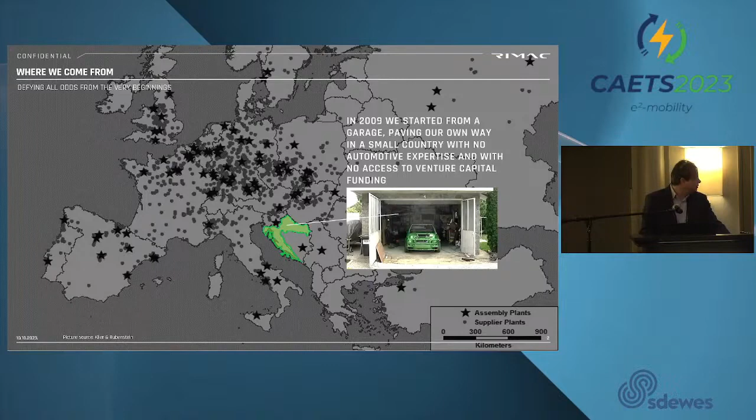Until Mate Rimac started the company in 2009 in a garage, changing his combustion engine into an electric motor, and then started winning races with his car and gathering the money. He founded the company with the aim to create the fastest fully electric vehicle in the world, and also provide technologies to other partners. So that was in 2009, 0 employees, 0 revenue.

And today, actually, we are about 2,000 employees, with a certain amount of revenue. Beginning of 2022, we carved out the company originally called Rimac Automobili into 2 companies: Bugatti Rimac, we'll say a few words later, and Rimac Technology, which is the supplier of components.

And this image that you see is one of the biggest projects in Croatia in terms of real estate, the campus Rimac is building close to Zagreb.

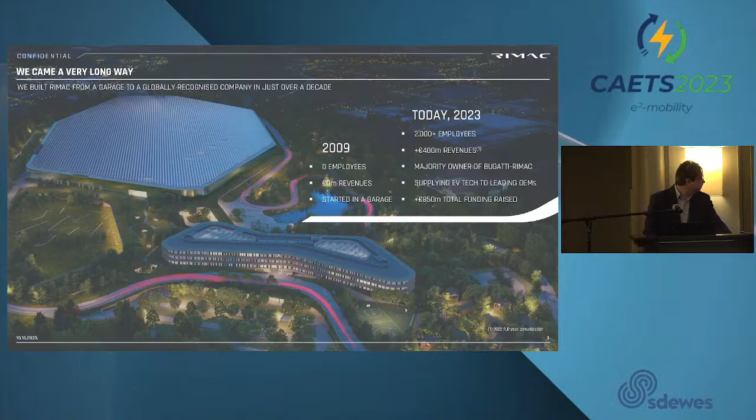So 2 companies, 2 businesses inside the Rimac group. Bugatti Rimac, with the aim to develop hypercars. So a very, very limited amount of vehicles, very exclusive type of customer, right? People who can afford vehicles above $2 million.

Usually. So the aim of this company now is, of course, to produce all the Rimac vehicles, the Nevera, that we will just introduce in the next slide, and all the next Bugatti, the famous Bugatti brand, and their next vehicles. And there's a part of the business which is a different company called Rimac Technology, with the aim to provide core technologies to car manufacturers in general. So the main focus is in electrification, providing full battery, axle, powertrain, but also technology like autonomous driving.

Control systems, and such. So the Nevera is the world's fastest hypercar, fully electric and homologated. That's very important because there's a lot of vehicles that are fast but not homologated. So we were wondering how we can help our customers to master this vehicle.

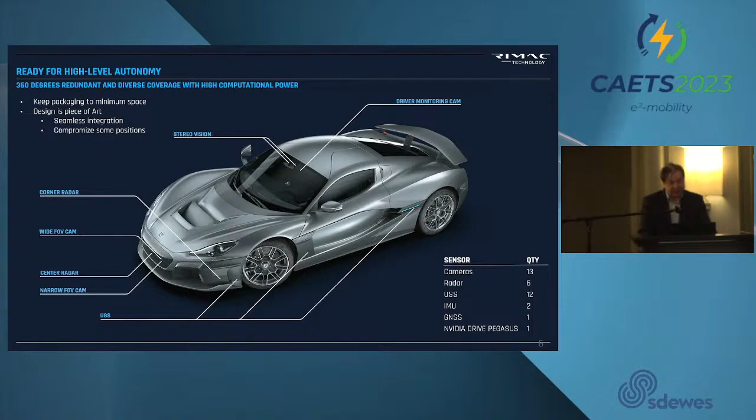So what is the product we developed with this autonomous driving? We call it the driver coach. Imagine the idea: you own a car and you go on a racetrack where you need to master a certain amount of skills. So the vehicle recognizes the track and says, welcome on, I don't know, Silverstone, for example, in UK. And then the car proposes, do you want me to demonstrate what you have to do?

And that's a fully autonomous demonstration. So you're on the track and you are totally guided by the vehicle.

It's driving autonomously at a speed or performance that you can adjust as you feel comfortable. While this is totally automated driving, you receive in your helmet, because on the track you need to have a helmet, a 3D audio feedback. So instructions, what the car is doing, all information about braking instant, steering instant, and so on. And you have also visual feedback on a cluster of the vehicle.

When this lap or 2 laps are finished, the session is completed, then the car can tell you, now it's your turn, show me what you can do. During this time, our AI supervises the driver, analyzing the skills of a driver and classifying it through beginner to professional by looking at the braking capability, throttle, steering, trajectory, and so on, and of course the speed.

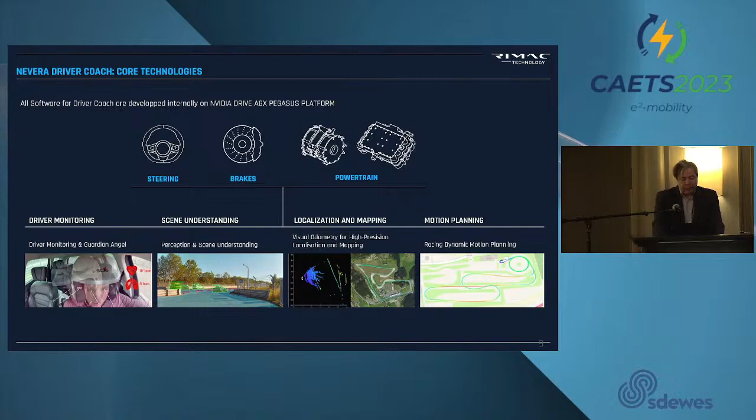So the vehicle, it's not only sensors that you need to equip, but you need to make it possible that you can control all the elements. That goes from the steering, the brakes, and the powertrain. Once you are able to control that, special parts of a vehicle and special additional software or suppliers are needed for this high level of autonomy.

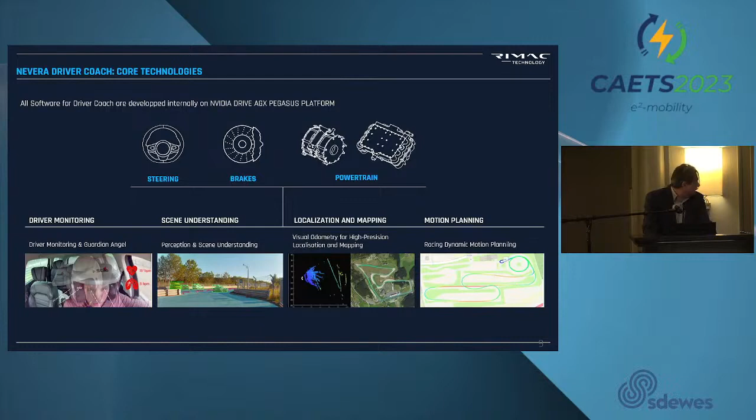And we are developing internally these 4 core technologies that I will pass in the next slide: perception, driver monitoring, localization and mapping, and motion planning.

But just before going to that, it's how we develop. So we need data, right? And this data, we have a small fleet of sports cars, the Kia Stingers, and we have our Nevera car. We have just one. It's a very expensive car, but I'm very lucky. I'm the only department in the company who owns a Nevera, so we can play with it on a track.

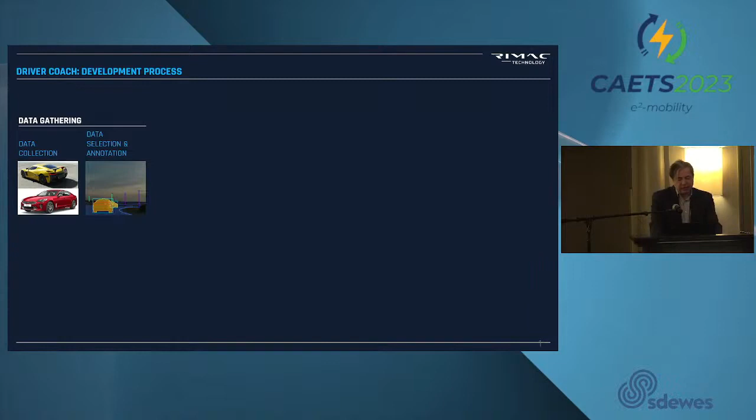And once we collect the data, we annotate it, but that's a heavy process. Another way is what we're using in simulation. While you use simulation, you can build scenarios and get the ground truth of the data automatically.

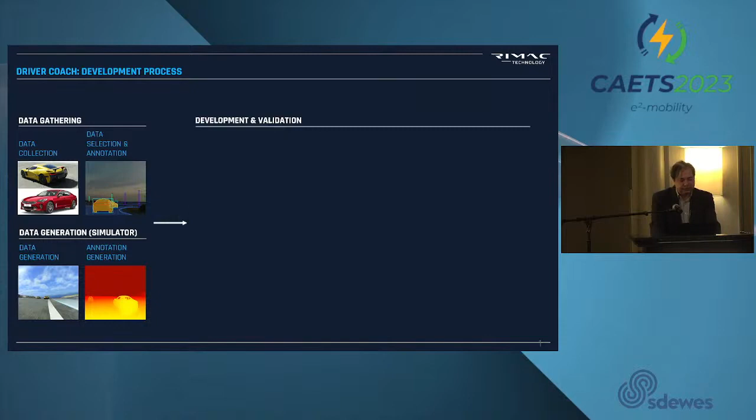And we are doing software in the loop development for all the core technologies. We're doing hardware in the loop to ensure that all the processing is executed in real time. And for example, we are also not allowed to put a piece of software in the car if it's not tested in what we call vehicle in the loop.

We have a big room where we have, I would say, the body of the vehicle and all the controllers inside the vehicle, and we can test the software. Of course, you cannot test autonomous driving in a room, but you can test all the interaction with the other entities of a vehicle and solve the first problems in terms of communication and the first bugs.

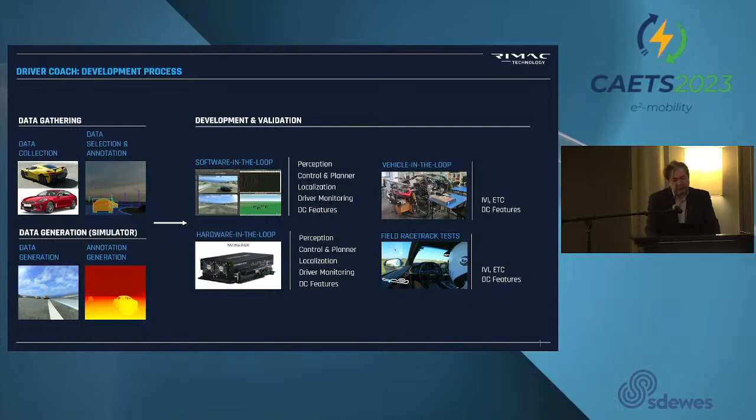And then once we're happy, we are testing on real racetracks with our team of pro drivers. This is the racetrack that we visited. It's mostly in Europe, about 26 tracks, all the most important ones here this year. Still, by the end of the year, we plan to go to the US, and early next year, probably to Japan.

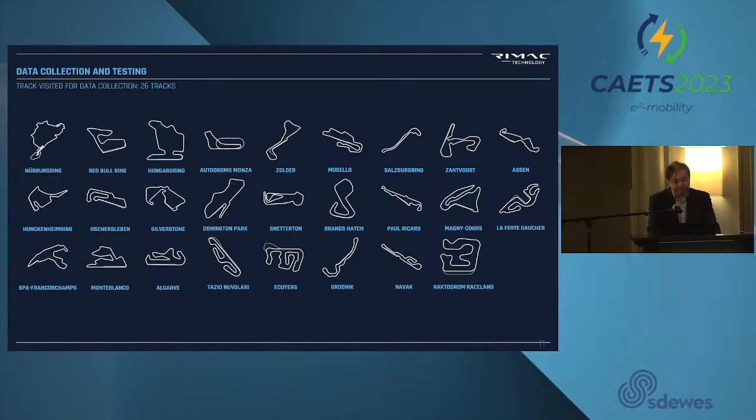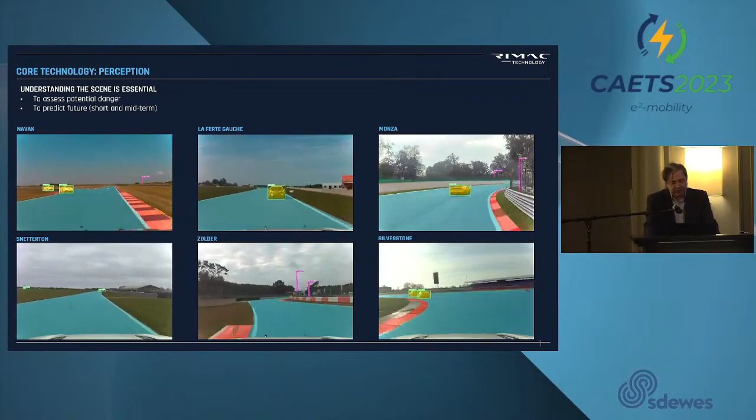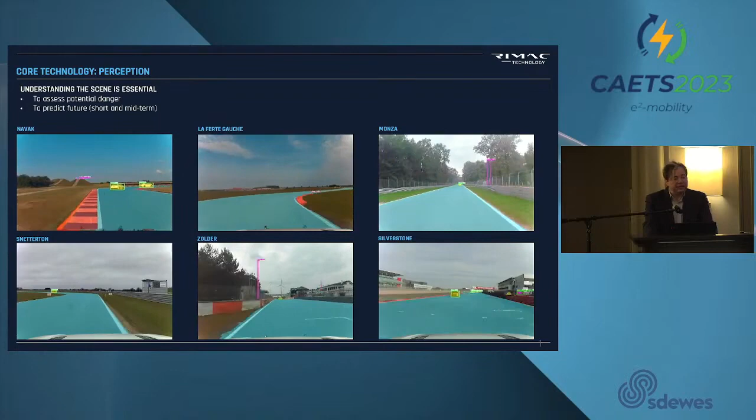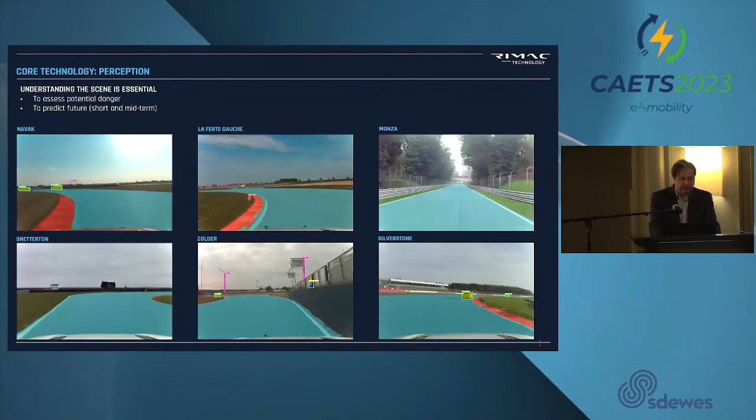So the perception, detecting the object - that's one thing. You can think, but what are these objects on the racetrack? They are probably very different than on a road. Yeah, you have very similar objects. You have pedestrians on a racetrack actually, you have vehicles, you have roads, but you have things that are new, like the curbs. You have similar things like the poles, but you have racing flags, racing lights. You can have, for example, a safety vehicle coming if there's an accident. And you need to be able to understand what's happening, especially when you drive autonomously.

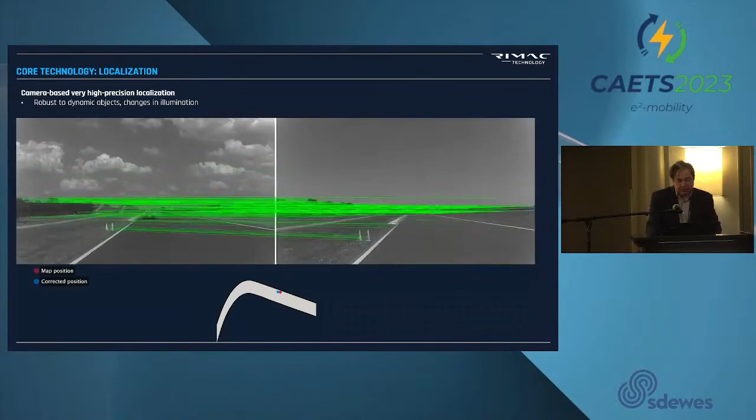In terms of localization, you see that's the same track, but taken at 2 different instants - you see also one, there's no cloud, weather is a little worse. What I want to show here is just that we can track the feature between these elements to be able to localize us precisely below 10 centimeters.

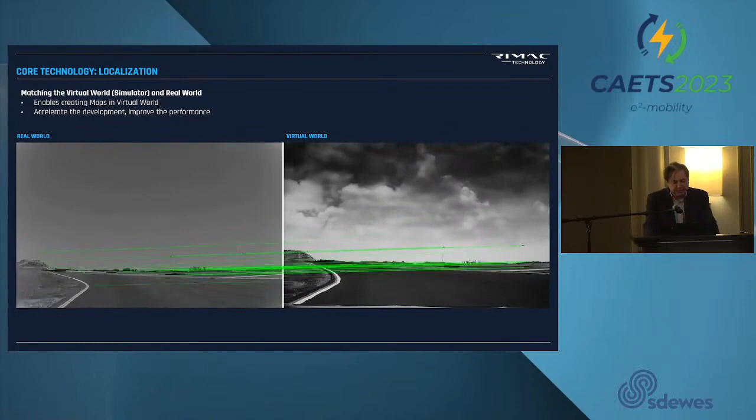But mostly, the task of mapping is quite an expensive task because you need to go on a racetrack. Usually you need to rent the racetrack for yourself, so it's pretty expensive. So one way we do the work is we work in simulation. What you see here is the same track - on the left side you have the real world, and on the right side you have a virtual world. And you can see we can map some features and understand where we are in this virtual world.

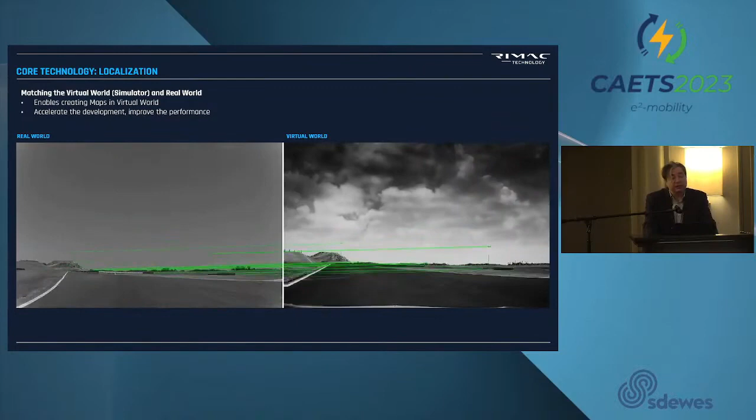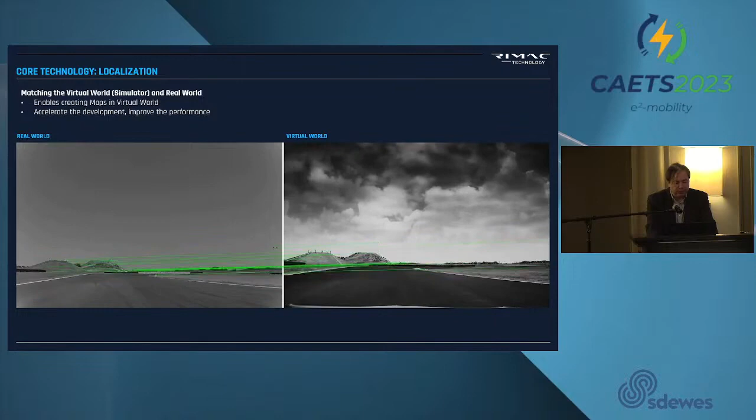This, for example, helps us for tracks like the Suzuka racetrack in Japan or Laguna Seca in the US, where we do not need to go to map the track. We can either purchase the track and work on it, and when we are happy, we go on the track and we tune or finalize the development of the algorithm.

In terms of driver monitoring, we are doing actually a lot of things. We're trying to understand the physiological and psychological status of a driver. So here what you see on the left side, the person was in the simulator. We collaborated with Leeds University, so we generated stimuli, visual and auditive, and we asked them to react, for example, to take the corners at a certain speed.

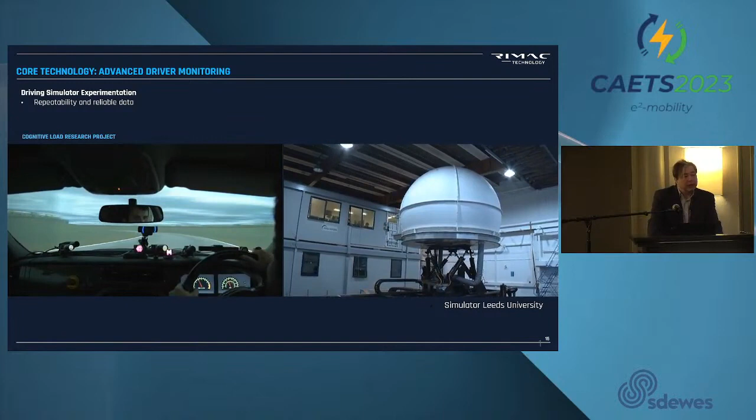And what you could see is - we had two groups of people, professional drivers and amateur drivers - here it's a professional driver, and you see that he didn't really behave well under certain stimuli. This helps us understand the cognitive load and then improve our user experience inside the vehicle, and improve safety also, because we know what type of instruction we need to provide at the right moment.

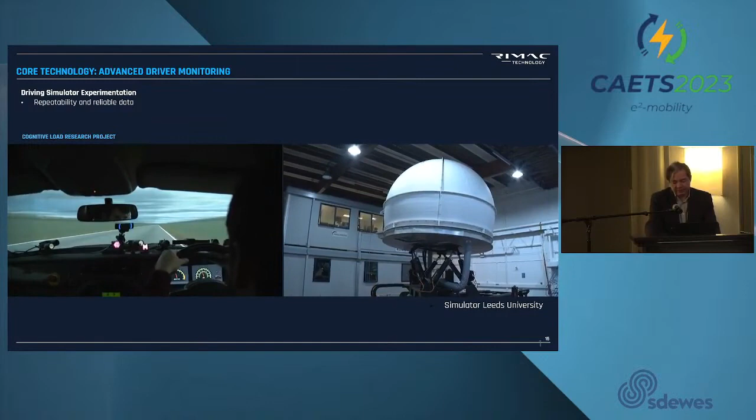Complementary to the test in a confined environment simulation, we did the same test on a real racetrack. We asked some drivers, professional and amateurs. This racetrack is pretty safe. We asked them to do the laps the best they could, and we generated stimuli.

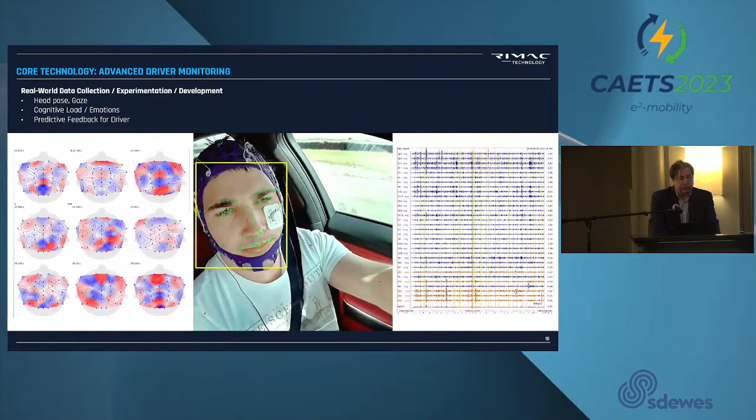We asked them to double blink, and they had to answer to some auditive messages. Using an EEG, we measured the cerebral activity and found out where the negative emotions are. We are very interested in negative emotions like anxiety and stress, but also the cognitive load.

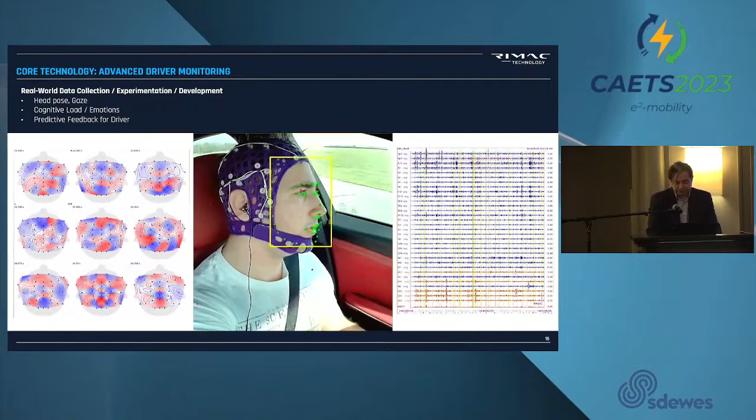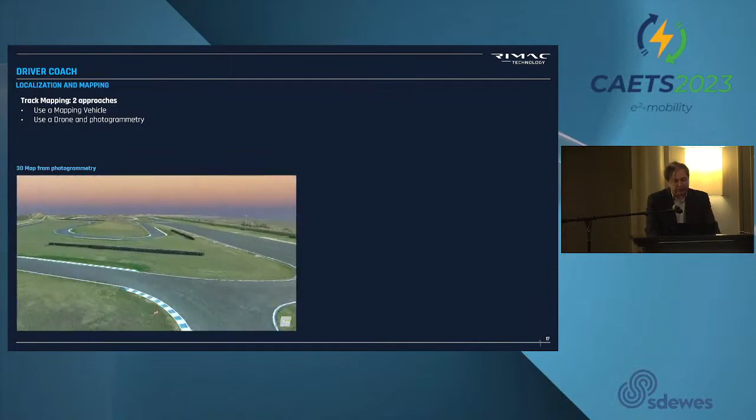In terms of mapping, we do some part of the mapping ourselves, because not all the tracks are available for purchase. So we use a drone, and we launch it all around the track, and we use the photogrammetry approach to create a model of the track.

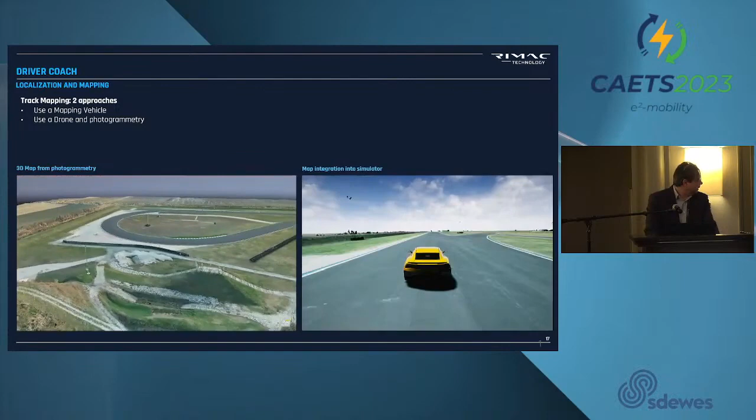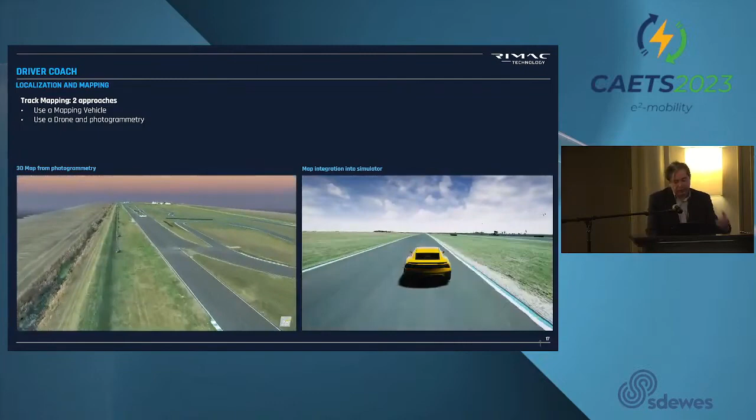That's the track that you saw before. Once we have this 3D model, we can integrate it into the simulator and drive the car, and then work on the racing line and so on, making it more and more complex.

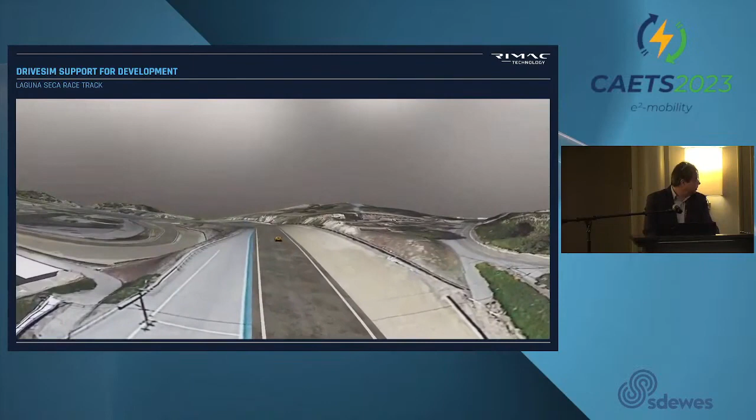For example, this is a track we haven't gone to yet, Laguna Seca, but we're already working on it. We drive the car, for example, in this situation alone.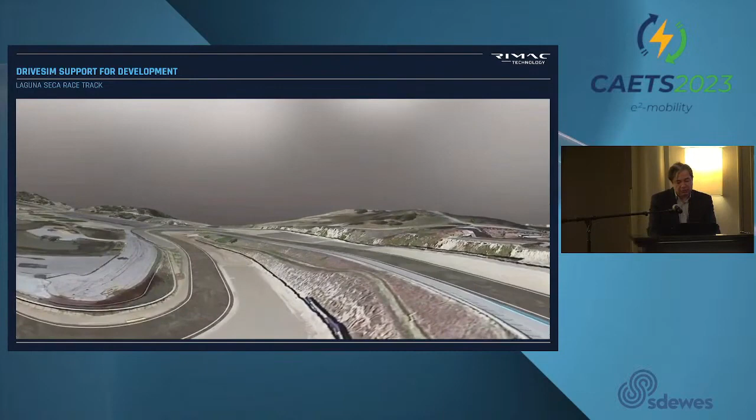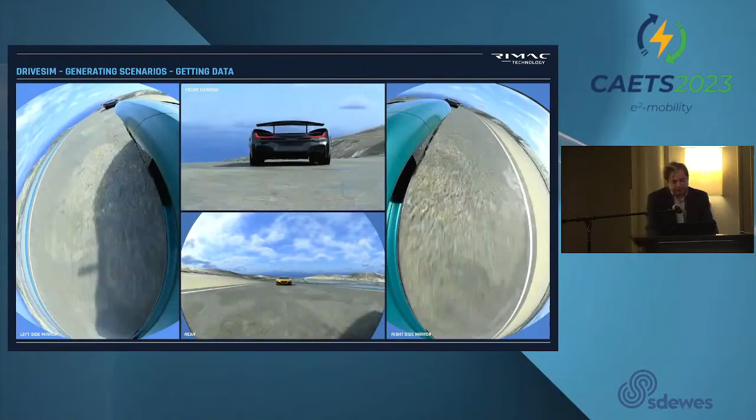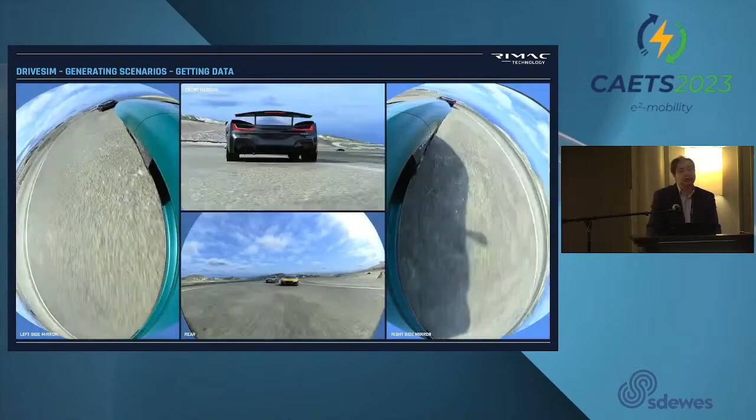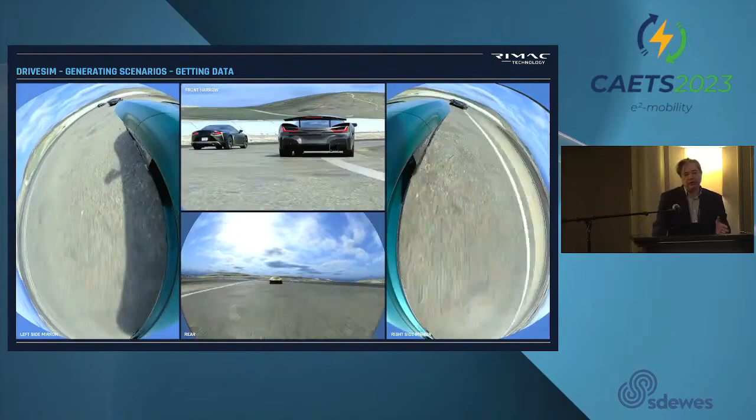In the next slide, I'll show you that we can reproduce exactly what the car sees. We model our cameras inside the simulator, for example, and we can generate virtual, photorealistic images of what the car sees. This is also in Laguna Seca, but here you see we have other vehicles, and we are working on avoidance or real racing algorithms.

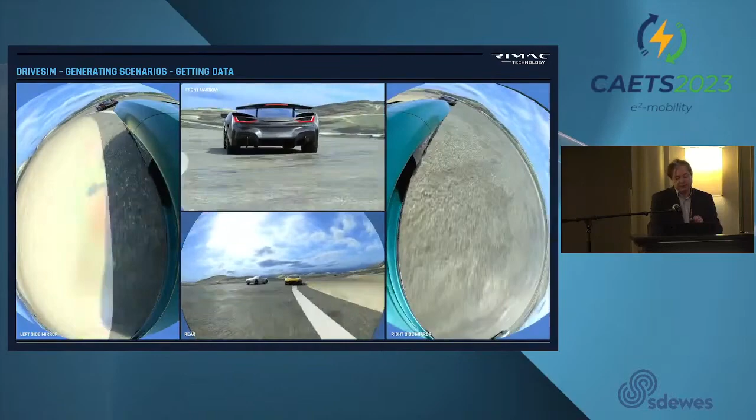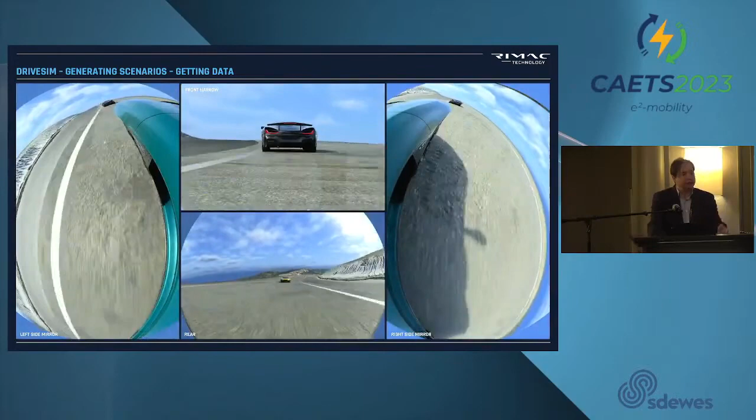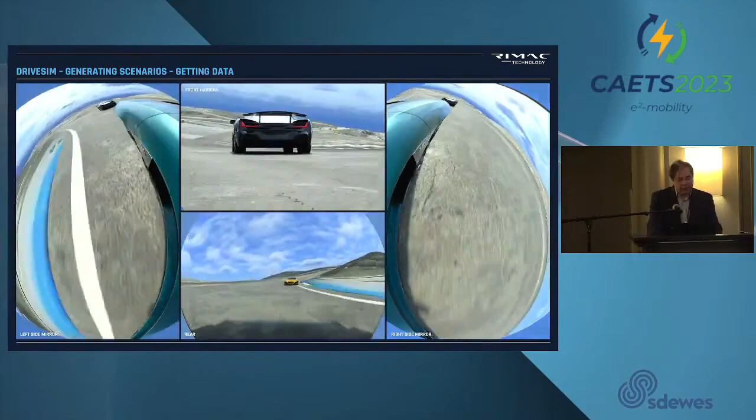Why this is also important: by generating these images and using the simulator, you can create scenarios that you might spend years, or maybe never, catch by just driving and trying to collect this data. That's the edge case problem. We use these virtual images to train our models, for example mixed with real data, in a mixed environment, and this improves all the algorithms.

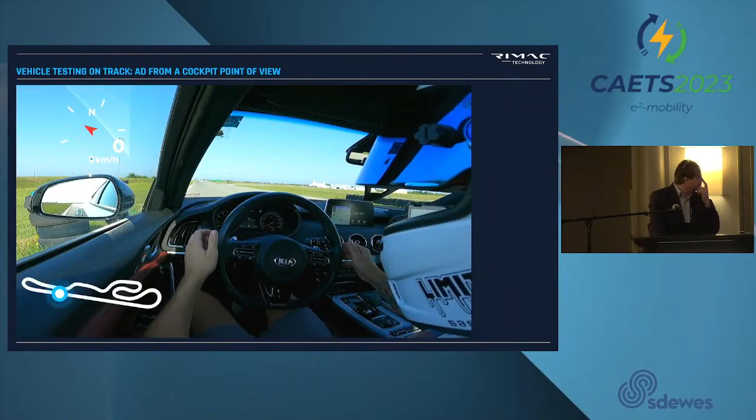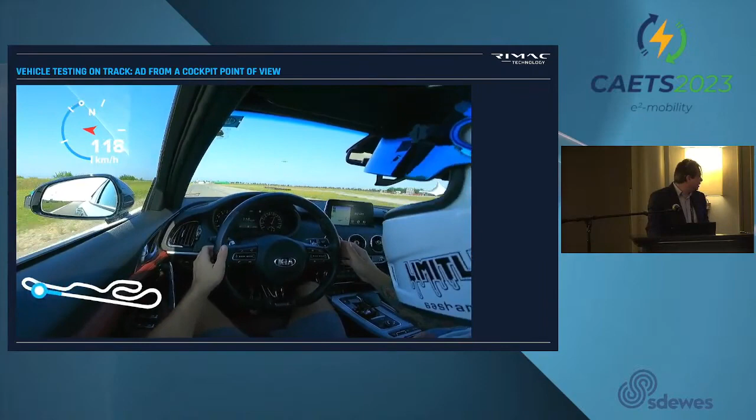When we are happy, here you see, for example, on a Stinger—I won't show it fully, but that's the racetrack you saw before. That's one of the tests. The car is driving fully using the width of the racetrack, the full width.

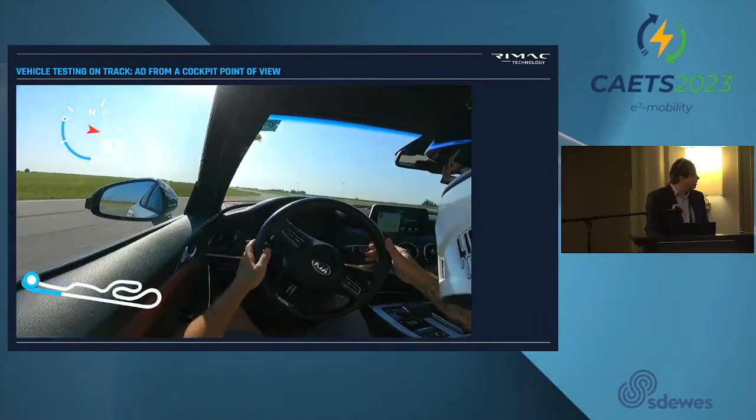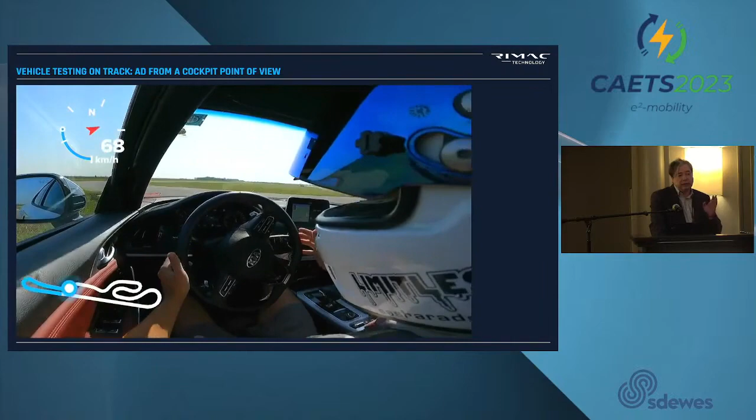What is important is working at the limit. Working at the limit means you saturate the tires. You take the corner the fastest possible, maximizing the lateral acceleration. By doing that, you are using the tires very much.

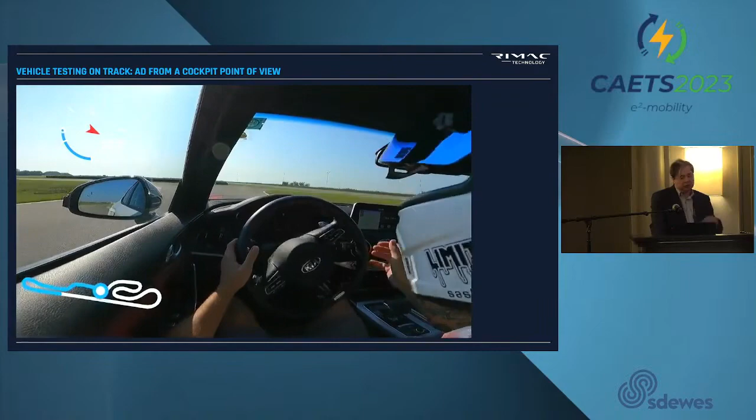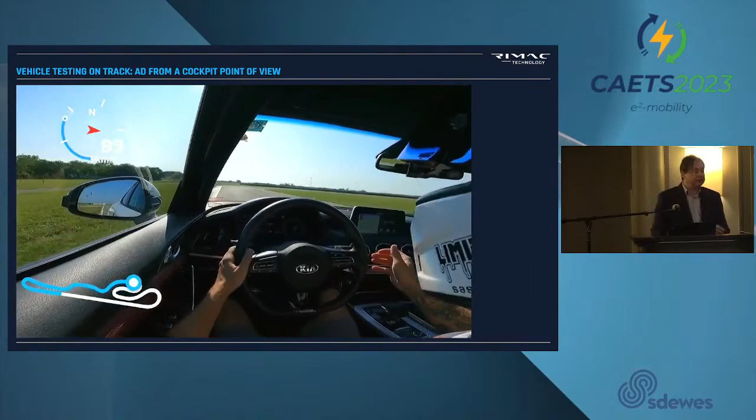After, I don't know, 5 or 6 laps, the tires and the brakes are damaged. The autonomous system needs to understand when this is happening, because if it doesn't, it will use the same speed entering the corner and will miss the corner. So you need to understand the degradation occurring in the vehicle so you can keep lapping and lapping.

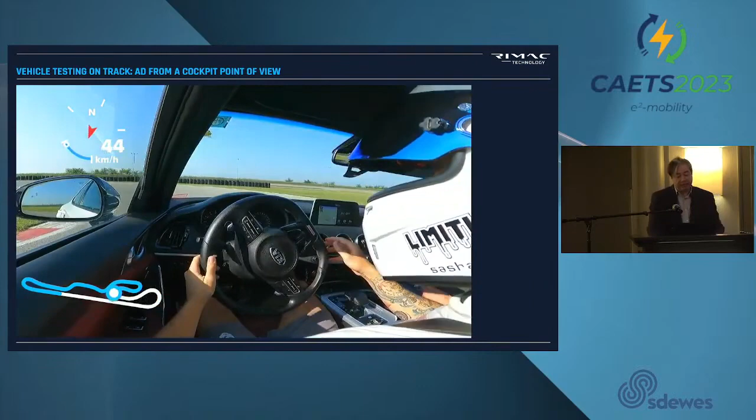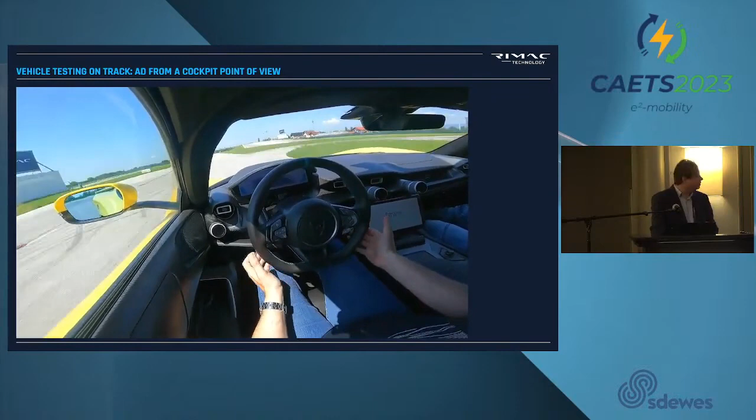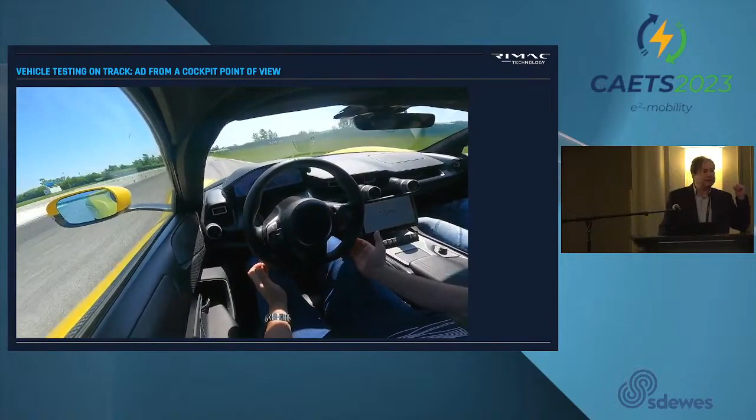You also need to understand when—this is, for example, the example on the Nevera. It's a little more impressive. That's close to Zagreb. It's not a racetrack, but a proving ground that we own. We reach this small straight line—one lap is 950 meters—and we reached the end of the straight line at 170 kilometers per hour. It can be scary, but this is just to show where we are in terms of technology.

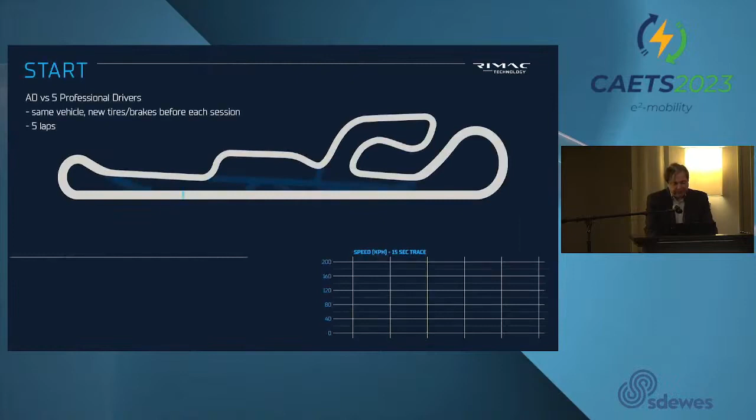And what you can see here, for example, is we are second, right? The autonomous vehicle is second, and you see in this corner we're overtaken by the pink dot, and then we are faster. And the blue driver is a killer driver, he won a lot of races. He's a champion, so that part, you see, we cannot beat him.

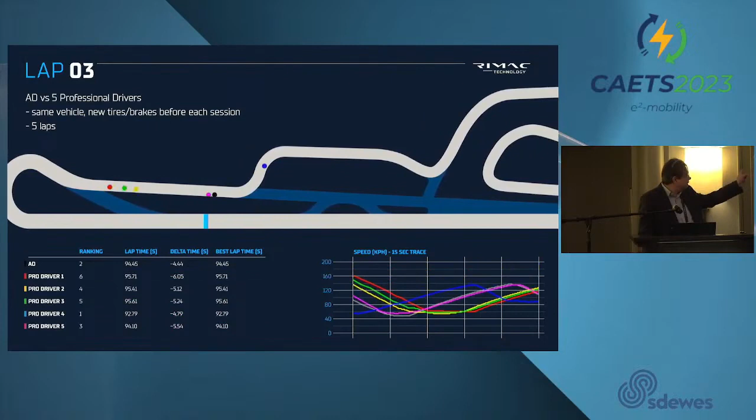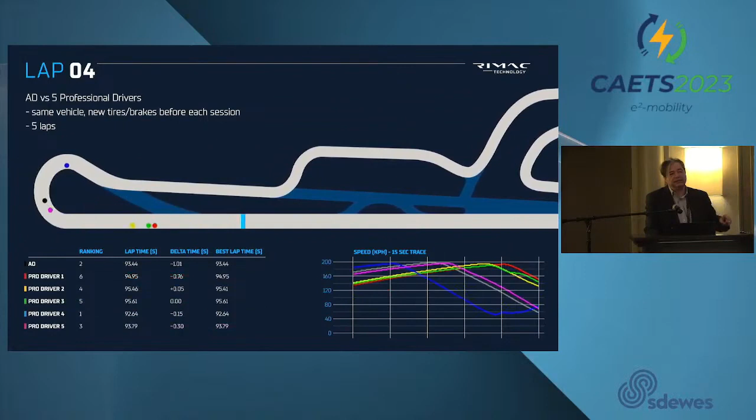But what's important to understand is our AI system's strategy was different in this final corner than the pink driver's. When reaching this corner, the pink driver's strategy was to enter fast and exit slow. Our AI decided to enter slow and exit fast, and that was actually a winning strategy because we could overtake him or be faster than him.

And what you also see in this table is that at every lap we improve our time. We stabilize, we understand the tires are getting hotter, warmer, and we improve our time. So we didn't win at the end, we finished second, but it's really a great result.

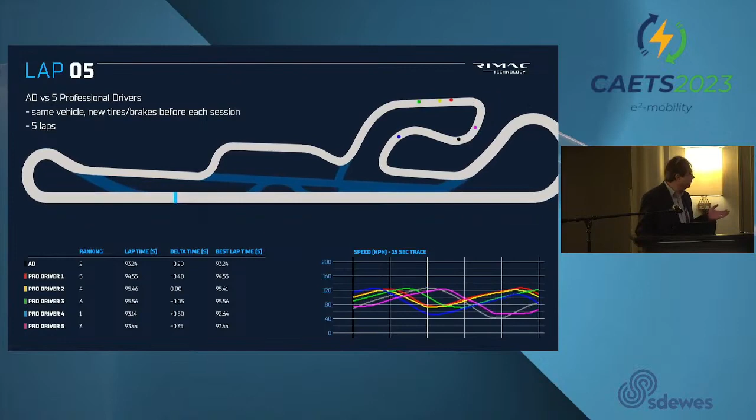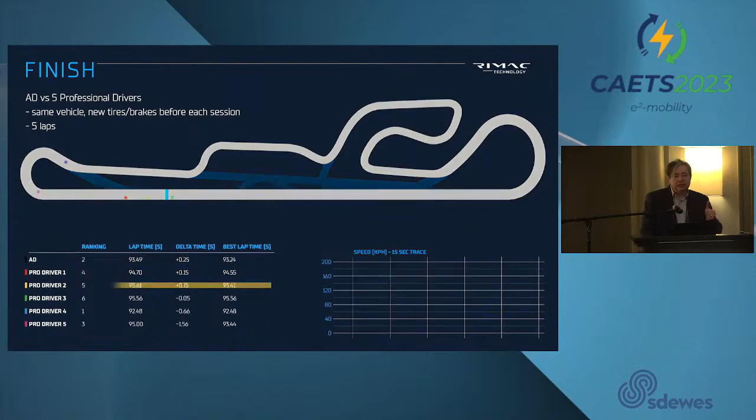One other understanding we have is that professional drivers, after a certain amount of laps, start making small mistakes, losing a little the stability of the car. You're always playing with the stability of the car, so sometimes you're oversteering, the rear part is moving, or understeering, while the autonomous system is still keeping things constant. So we believe that if we did 10, 15 laps, we would finish first, and that's all from me.

So that finishes my presentation. Thank you for your attention.

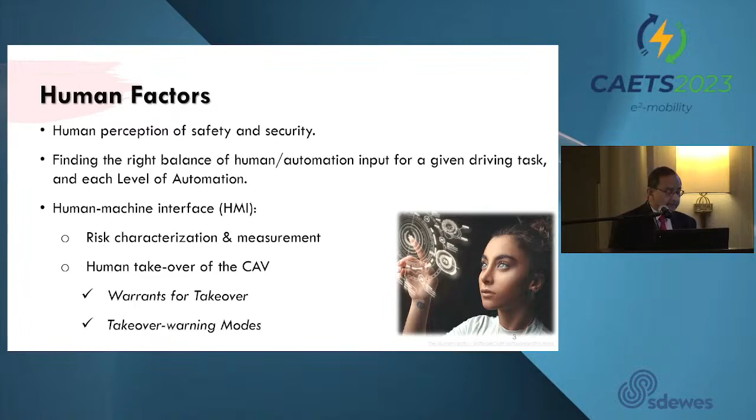And as I said, vehicles we are working on well, but drivers and other human beings and infrastructure - I'm a civil engineer, I feel there is a lot of work to be done in infrastructure readiness. And it will, of course, depend on market penetration of each level of autonomy in the transition phase.

There are a few examples I have. Highway agencies will not spend money to do anything until they're sure it is needed. So we need better demand modeling. So all of these things have to work together. And then eventually, as the transition goes on, we need new infrastructure types, and also retire existing infrastructure types.

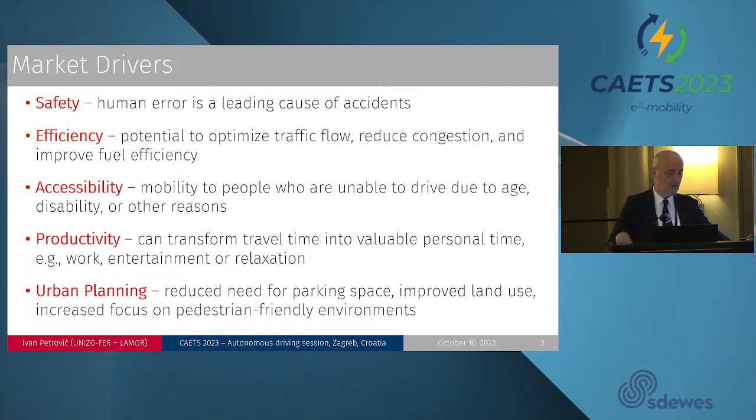Productivity - the previous speaker mentioned we could enjoy the time in the car, or do some work, entertainment, relaxation, and so on. Autonomous cars could also help in urban planning: reduced parking space, improved land usage, increased focus on pedestrian-friendly environments, and so on.

What are the challenges behind those vehicles? There are a lot of technological challenges. The technology should be reliable in terms of both hardware and software, and be able to handle complex and unpredictable real-world scenarios. Of course, we are all aware of regulation and legislation issues.

There's a need for introducing a legal framework for liability, insurance, and safety, and also harmonization of regulations across jurisdictions between many countries in the world - different cultures, different jurisdictions. Also, convincing the public - trust in autonomous technology.

You mentioned this taxi and the issue of acceptance. We are now in a transition period in front of us, where we have conventional cars and autonomous cars - this mixed-use scenario on the roads. That could really have potential complications. I think the situation will be much easier when all cars are autonomous in the future.

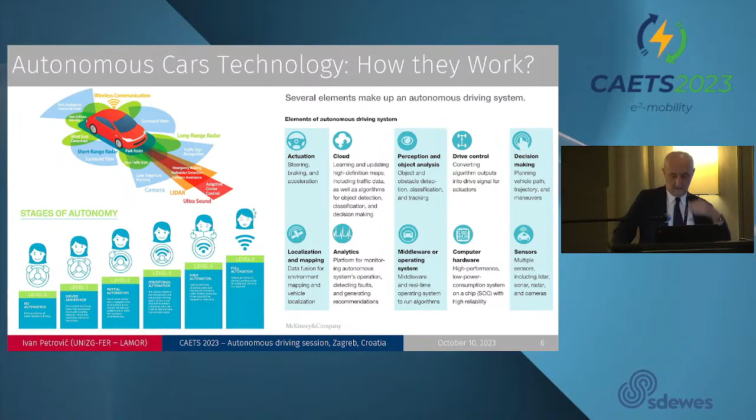Here are some elements - from sensors, localization, mapping, as Sasha already mentioned, decision making, perception, object analysis, classification, detection, tracking, and also cloud infrastructure and high-performance computing will be very important.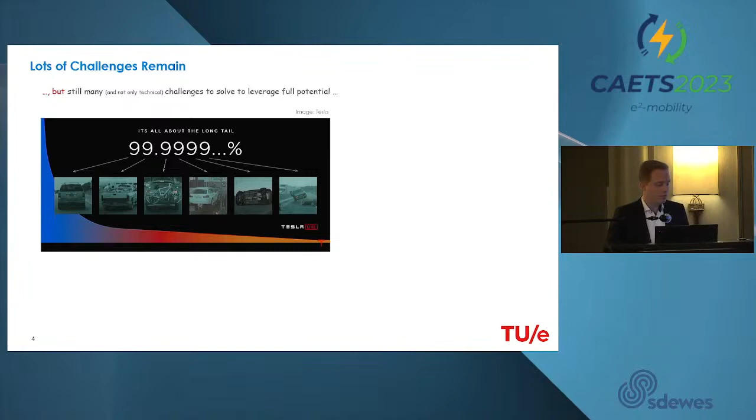And the same is for motion planning and for every other domain. So we're still facing a lot of challenges, among them, and I cannot count all of them, so I'll just choose a few, focusing a little bit more on the technical aspect.

Sensing and perception, I already mentioned it. What you can see is basically scenarios here where a car flipped over, or there's a car on a trailer. There are a lot of things where an autonomous vehicle could draw false conclusions.

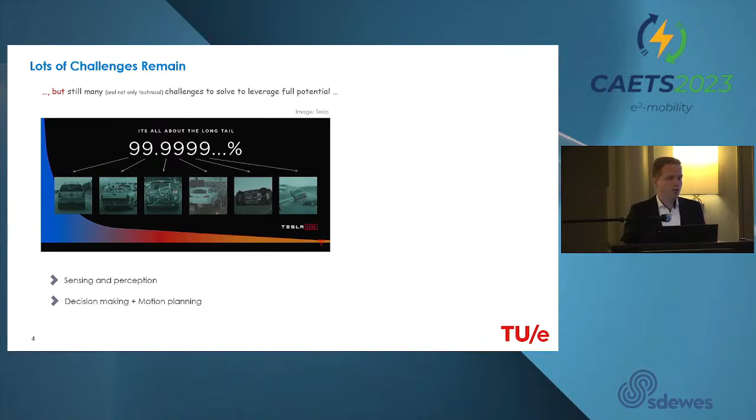We also have decision making and motion planning, which is quite complex. I see in industry that many approaches are still heuristics, right? And if you want, from my personal perspective, to exploit the full potential, you may want to look into optimization, into machine learning, and many questions arise also there.

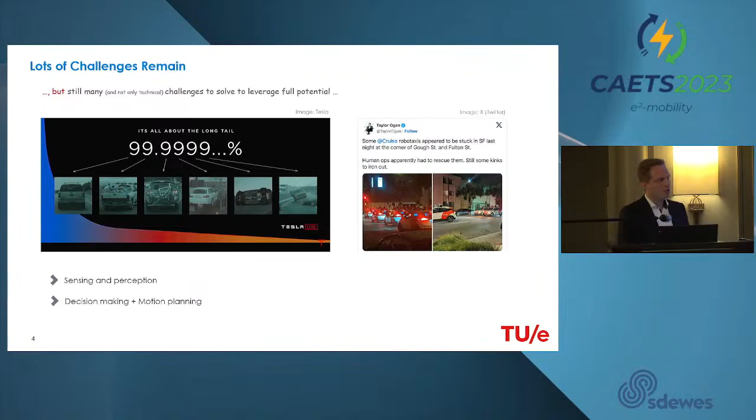We think that a lot of things have already been solved, but here is a post on X, formerly Twitter, where robotaxis in San Francisco got stuck in one single road, and interestingly, there were like 30 or 40 vehicles of Cruise all in the same spot. They could just basically get rescued by human intervention. So although these vehicles operate quite nicely in this environment, there is still a low chance, a long tail of the distribution where there's a low probability, but there are a lot of cases that can go wrong.

We also have compute power. If you want to apply more sophisticated algorithms that use machine learning or optimization, we have to solve those problems in real time. And also machine learning can significantly reduce your battery charge. So if you have to leverage a lot of compute power, what does it mean? You have 200 kilometers less in range. Is that acceptable? How do we handle all those things?

That relates also to energy efficiency. How do we combine decision making and motion planning with efficiency aspects? What you can see in industry is that many motion planning problems focus on the motion planning itself and not so much on efficiency.

So there is also a lot to do, and we have heard in the previous talks that legal and ethical aspects are of high importance. We don't have to forget the human, which is still there and is a very important component of the whole control system, although the system might be automated.

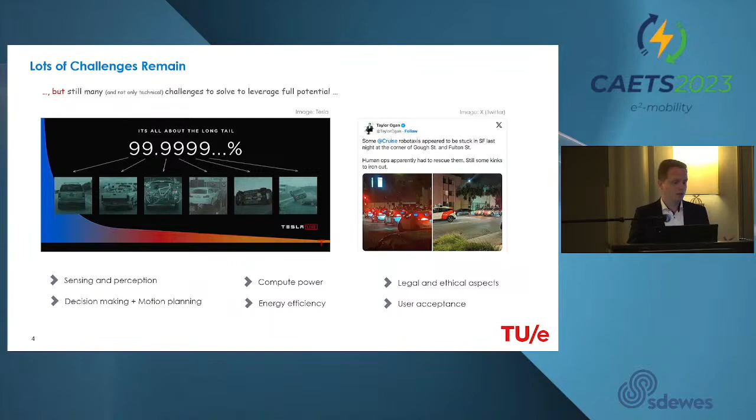So for the upcoming discussion, I decided to come up with 3 questions that move me the most in my everyday life, in industry, but also at university. I'd also be very interested to understand the position that Rima, for example, has in that regard.

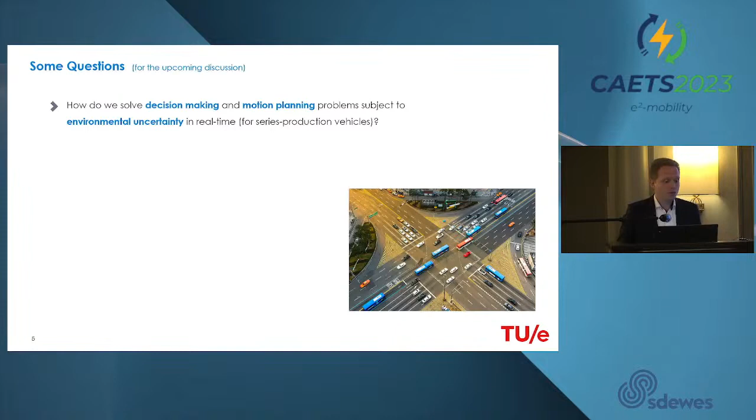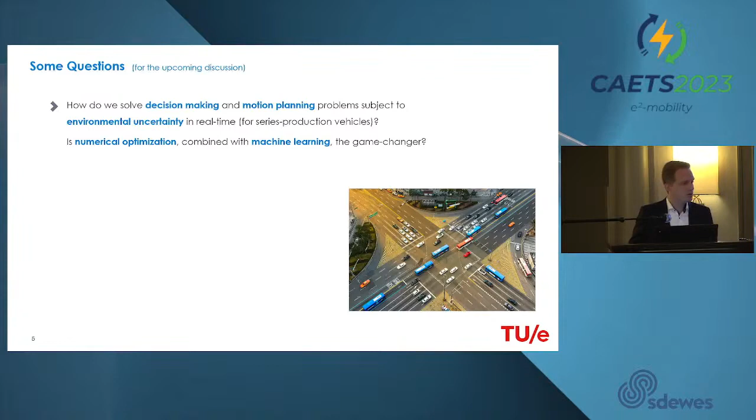How do we solve decision-making and motion planning problems subject to environmental uncertainty, in real time, and for series production cars? As I said, in industry, for example for autonomous parking systems, you see a lot of heuristic approaches still, but they cannot exploit the full potential. So the question I'd like to raise is: is numerical optimization combined with machine learning a game changer here? Or do many peers think that such methods are not tractable in series production cars for many reasons?

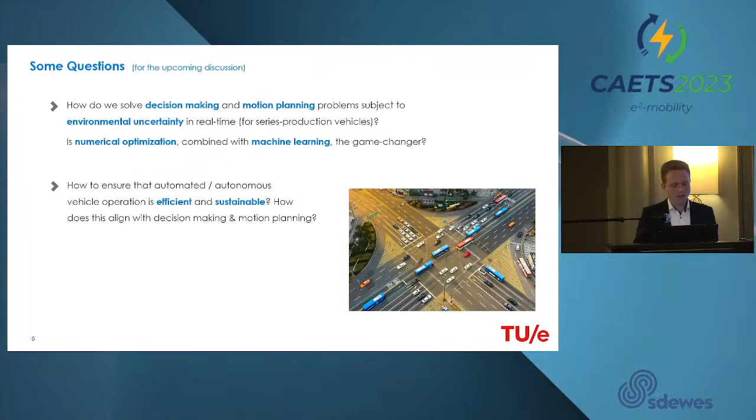Also, how do we ensure that automated autonomous vehicle operation is efficient and sustainable? Because in industry, and also in academia, there's predominantly a focus on how to operate the autonomous car to get from A to B, how to take decisions, but very frequently efficiency is not necessarily taken into account. How do we combine these two aspects?

And finally, it's a bit of an overarching question, I think it was also kind of covered by the previous talks. I'm asking myself, how do we interact with the transportation system? Motion planning kind of focuses on a single vehicle, a little bit selfish I would even say, how do I get from A to B? But if I want to interact with the transportation system, I somehow may have to sacrifice my own goals in order to achieve an overall improved efficiency in terms of traffic flow, in terms of energy consumption in a road section or in a confined environment.

And also we can think about vehicle charging. So if I have electric vehicles, where do I charge them? How do I avoid grid congestion, for example, so I don't charge all the vehicles at the same time in the same place? So there are a lot of things that are still open.